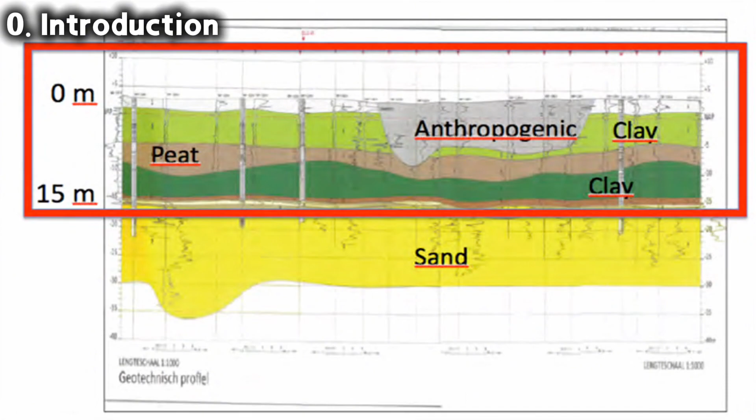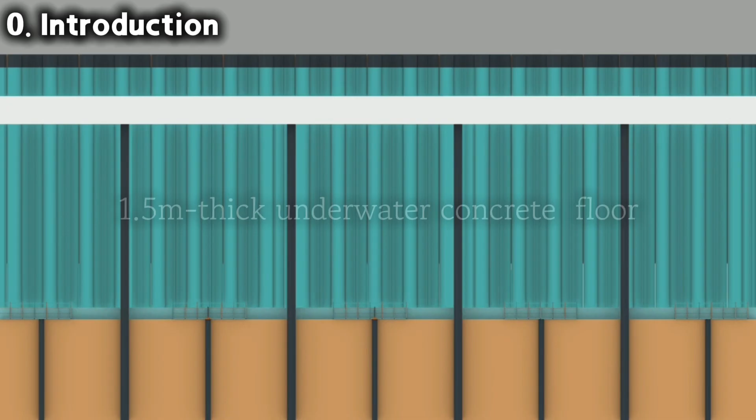Navigating the challenges of unstable soil, the construction of the Markthal in Rotterdam reflects the commitment to modern architectural innovation. After laying 480 tons of reinforcement, a 1.5-meter thick underwater concrete floor was poured and allowed to harden. Once the concrete set, the water was carefully pumped out, employing impermeable barriers and dewatering solutions to reveal a smooth, watertight floor capable of supporting up to 12,000 kilograms per square meter.

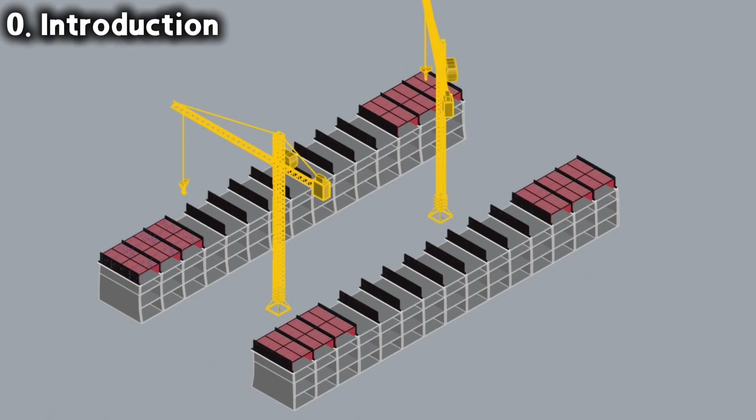With the foundation laid, the project moved upward to construct the unique horseshoe structure using the tunnel formwork system. Building the arch roof was a notable engineering endeavor, supported by temporary, mobile shuttering to accommodate the apartments and penthouses.

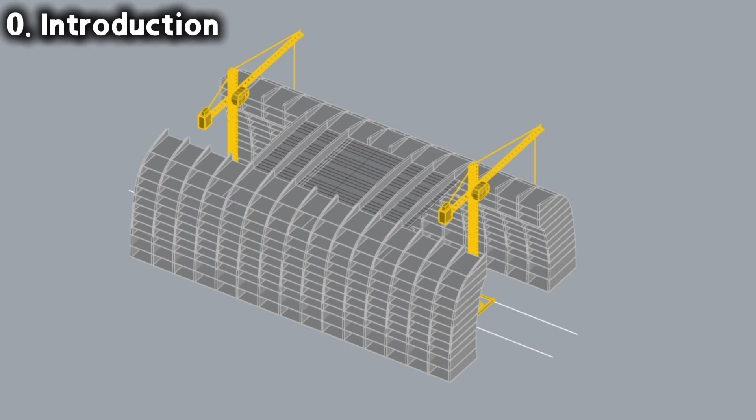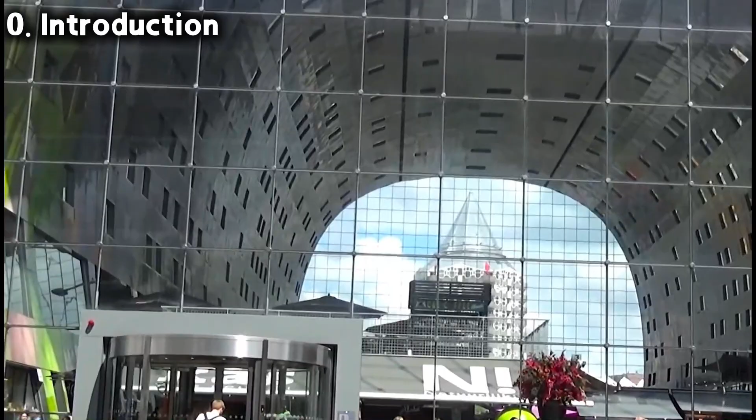Inside, the market hall features the Horn of Plenty artistic ceiling that spans 11,000 square meters, adding vibrant artwork to the space. The Markthal seamlessly blends market and residences with single glazed cable net glass facades, enhancing transparency and connection to the city. Having tackled the foundational hurdles this week, we now move forward to explore the architectural feats involved in crafting the arch and keystone.

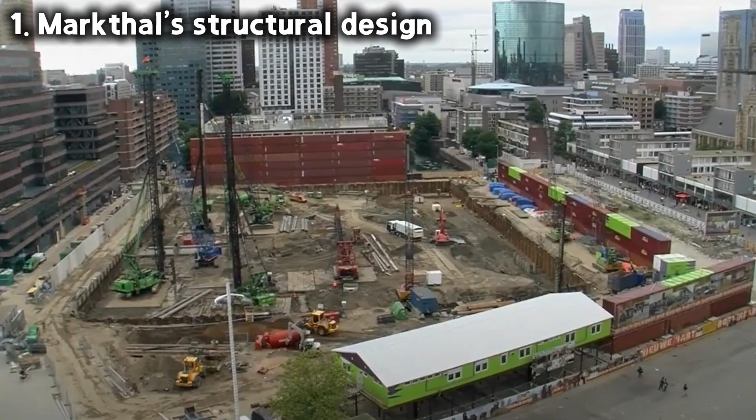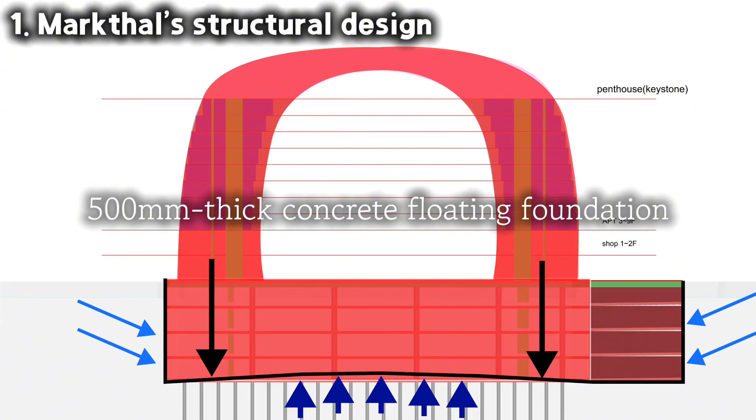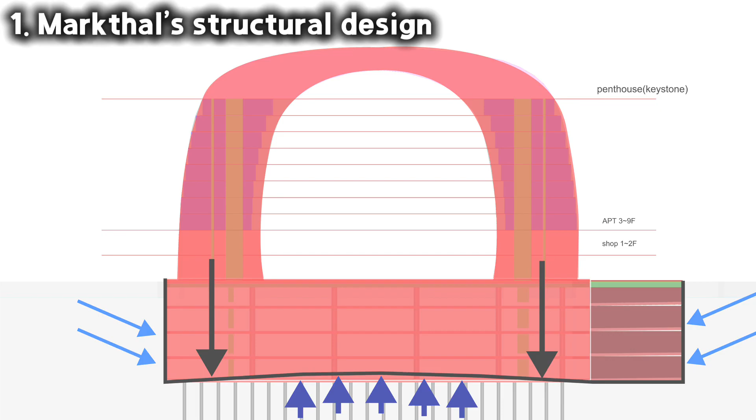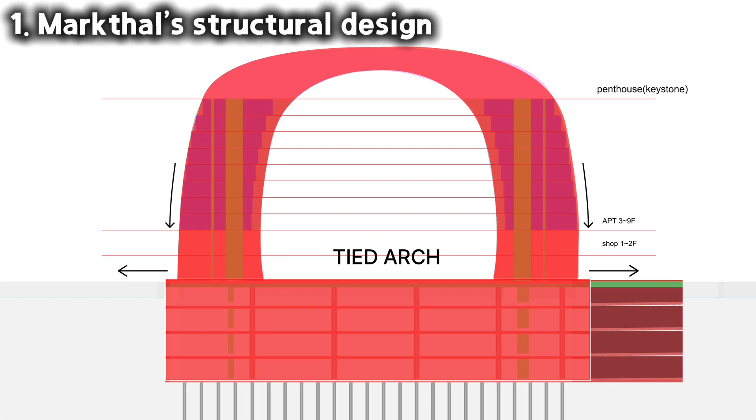The Markthal's structural design exemplifies an advanced integration of architecture and engineering, rooted in a thorough understanding of geotechnical conditions and executed through a monolithic approach. Supported by approximately 2,500 piles driven 20 to 30 meters into sandy subsoil, the 500-millimeter thick concrete floating foundation responds elastically to differential settlement and groundwater pressure, enabling the building to adapt to Rotterdam's soft, compressible soils and high water table. This foundation not only bears vertical loads, but also works in concert with the underground parking level, which acts as a horizontal tension tie, bracing the arch and resisting lateral soil pressures.

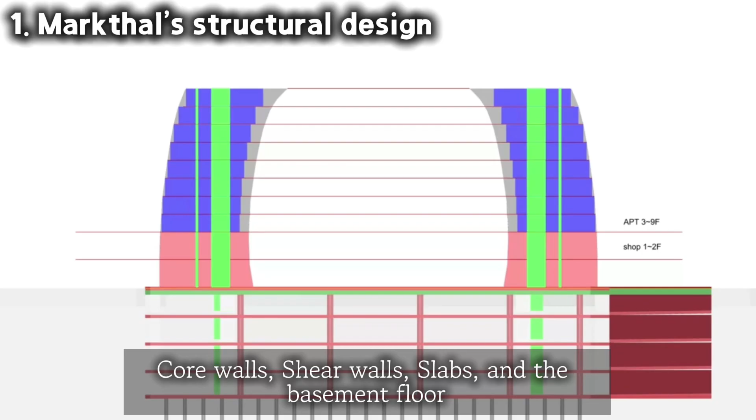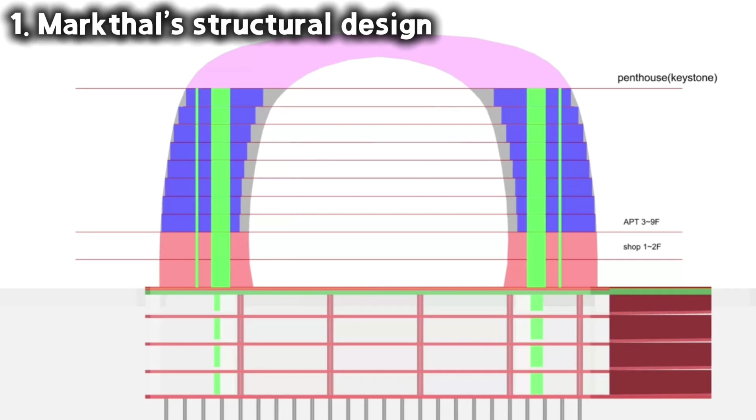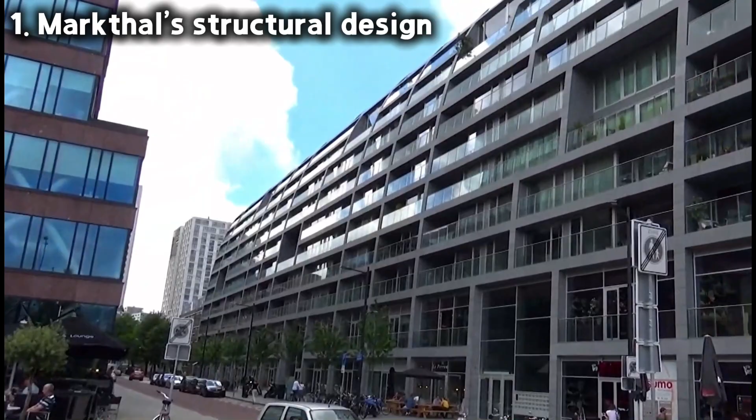Rising 40 meters high and spanning 45 meters wide, the arch-shaped superstructure forms a continuous load-bearing shell through the seamless integration of core walls, shear walls, slabs, and the basement floor, avoiding the weaknesses of segmented construction. These elements collectively distribute loads and resist both vertical and horizontal forces, with the upper residential levels functioning as keystones to stabilize the arch. Built using in-situ concrete rather than precast components, the Markthal achieves both structural integrity and visual impact, demonstrating how monolithic design and elastic foundation strategies can deliver resilient, elegant solutions in challenging geotechnical environments.

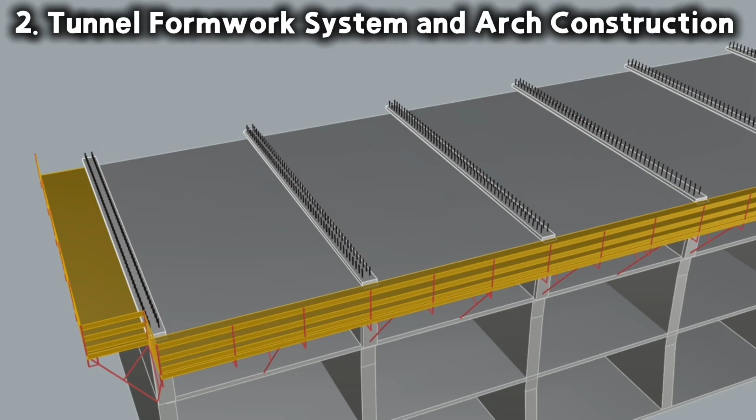The core walls and shear walls serve as the principal vertical load-bearing systems, channeling gravitational forces from the top of the arch to its foundation. Meanwhile, the floor slabs, constructed with tunnel formwork, provide horizontal stiffness and tie the vertical walls together, enhancing the building's lateral stability. This system not only supports vertical loading but also resists horizontal and torsional forces, ensuring equilibrium within the arch structure.

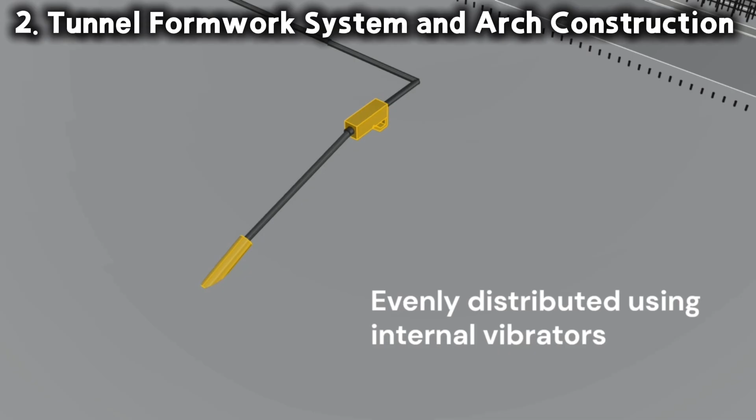Tunnel formwork is a construction technique primarily utilized for structures requiring repetitive and uniform units, such as apartment complexes, hotels, and barracks. This method leverages prefabricated forms or molds to create walls and slabs in a single process, significantly enhancing construction speed and efficiency. The process allows continuous casting of concrete, integrating structural elements seamlessly into a cohesive, monolithic framework, which is particularly advantageous for large-scale projects requiring rapid completion and cost efficiency.

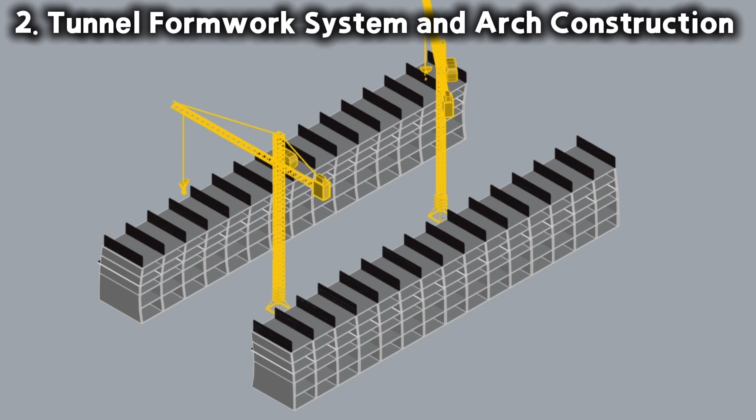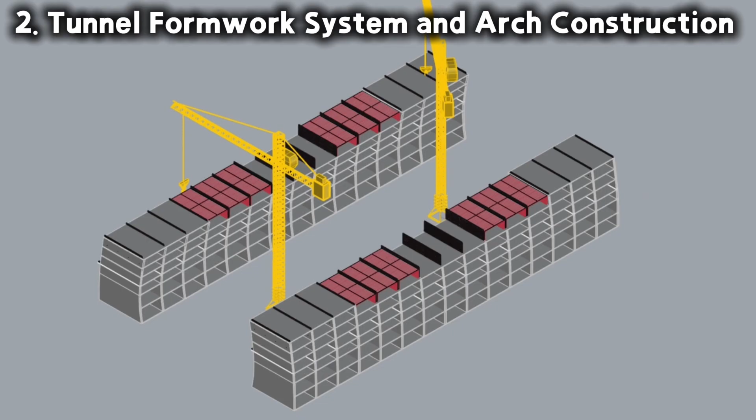In the construction of the Markthal in Rotterdam, tunnel formwork was adapted to accommodate the building's unique horseshoe-shaped arch structure. The methodology facilitated the efficient construction of repeated structural cells that form the arch, incorporating both vertical core and horizontal slab elements. Tunnel forms were positioned to support the simultaneous casting of walls and slabs, moving incrementally inward with each ascending floor. This allowed for the gradual narrowing of the gap between the arch sides.

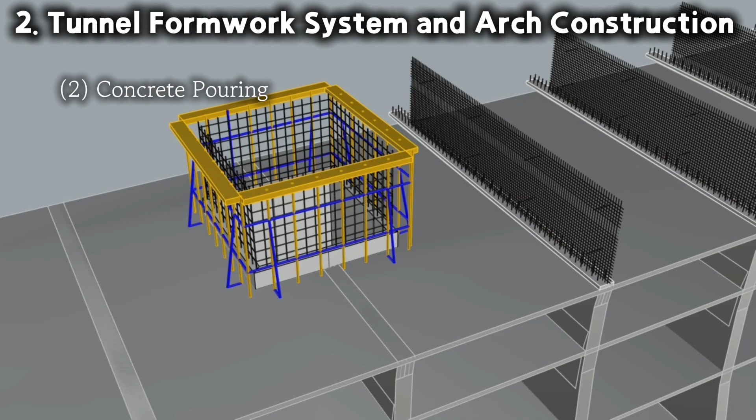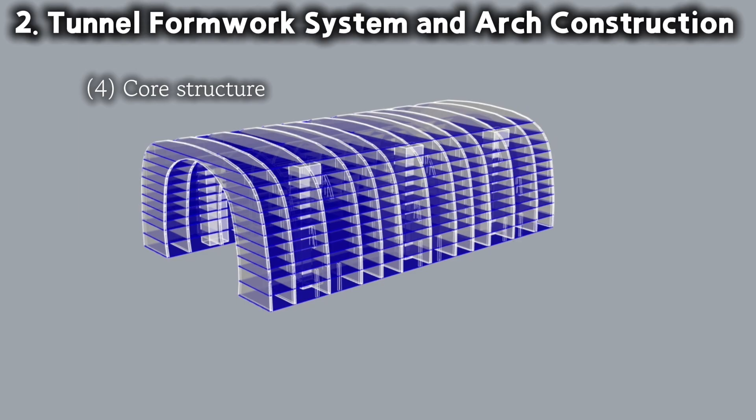A single operation involved pouring concrete for walls and slabs, using internal vibrators to ensure even distribution and density. The cycle was repeated in 3-day increments, facilitating continuous progression and structural integrity. The cores provided lateral resistance and were constructed synchronously with the tunnel formwork, ensuring alignment with the progressing arch and maintaining monolithic continuity. The slab and wall integration using tunnel formwork eliminated seams and weak points, creating a unified structure capable of bearing substantial loads and pressures distributed evenly across the arch.

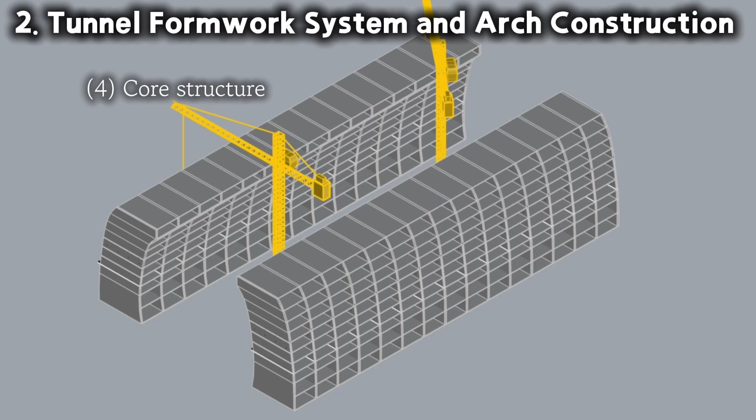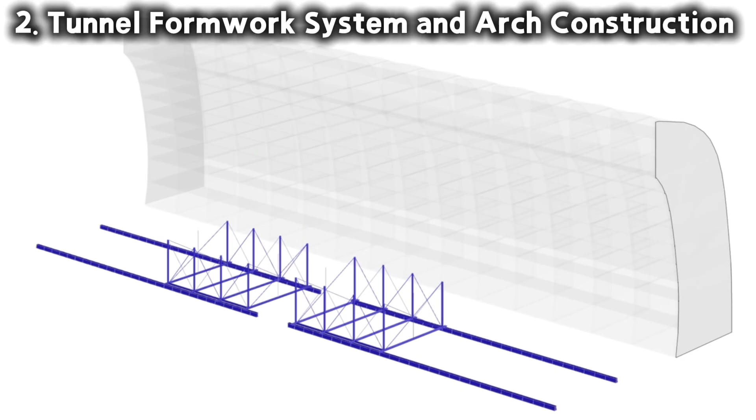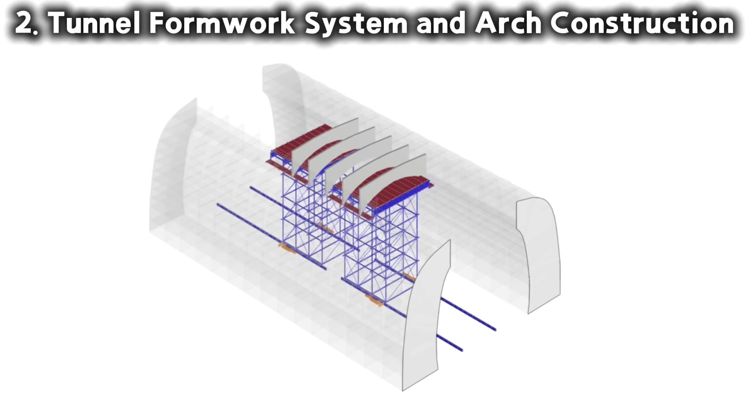In large arch constructions, such as the Markthal, shoring or temporary support structures played a crucial role. These supports, including steel trusses and brackets, were essential at various construction stages to stabilize formwork and platforms, especially where there were no concrete cells below to provide support. Temporary steel shoring supports were strategically placed to stabilize platforms and load concentrations, particularly in areas with complex curvatures and those lacking foundational support. Load distribution. These supports were designed to evenly distribute loads across unstable sections, enhancing safety and maintaining structural integrity throughout the construction process.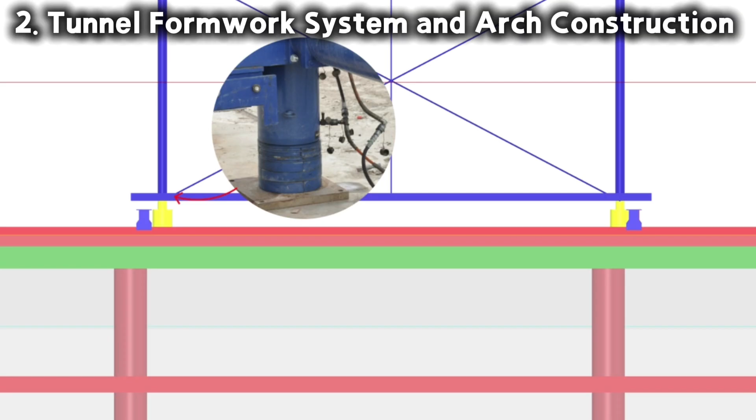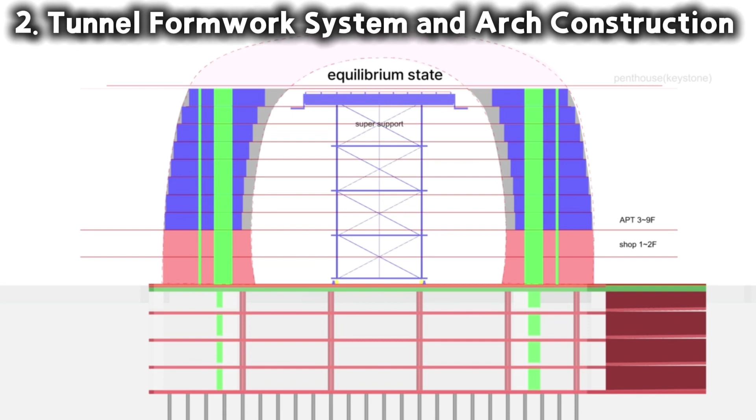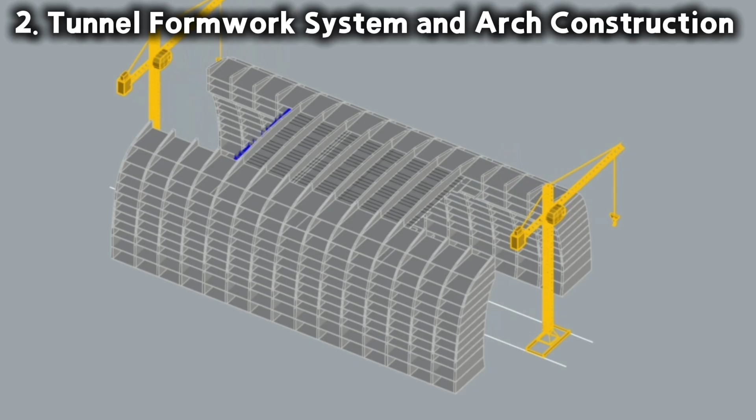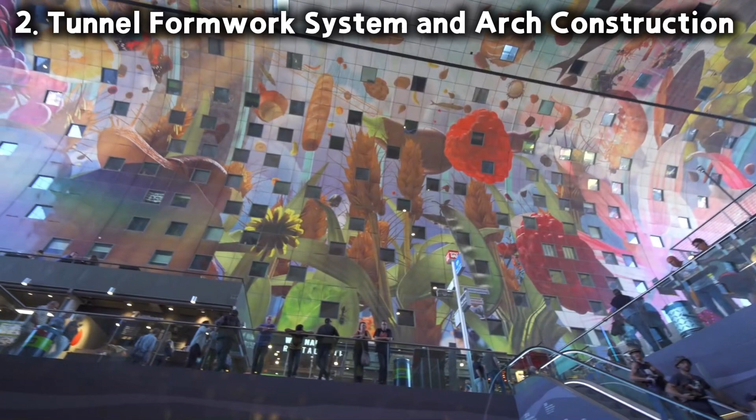The keystone was a pivotal element in the completion of the Markthal arch. This crucial part connects the two lateral arches, ensuring structural equilibrium. The construction process culminated with the placement of the keystone at the apex of the arch. This section, approximately 5 meters high, integrated floor slabs, walls, and roof slabs into a continuous structure. Structural function. Acting as the arch's central locking piece, the keystone consolidated the structure under compression, allowing the adjoining arches to balance each other. This effectively transformed the arch into a stable, self-supporting entity, eliminating the need for additional central columns and enhancing the open spatial concept beneath.

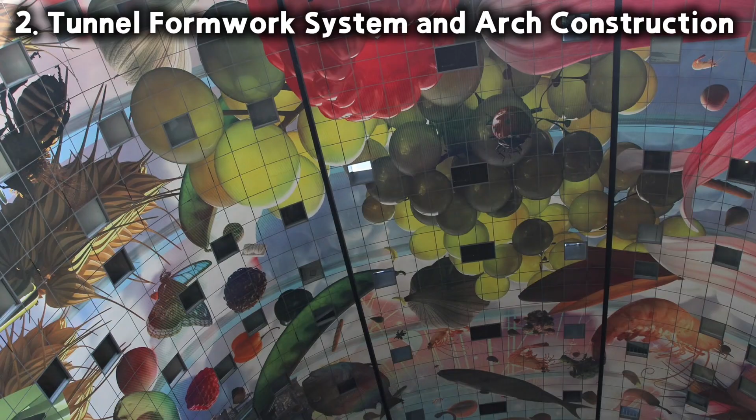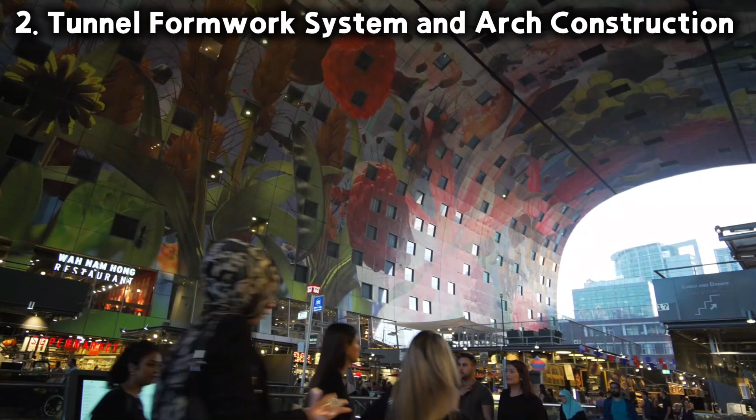The application of tunnel formwork in the Markthal not only facilitated its construction efficiency, but also ensured its resilience and architectural symmetry. Integrating core structures and slabs into a monolithic design while utilizing modern shoring techniques and the strategic incorporation of the keystone exemplifies the innovative approach undertaken to erect this iconic edifice on challenging terrain, solidifying Markthal's place as a landmark of modern engineering and design.